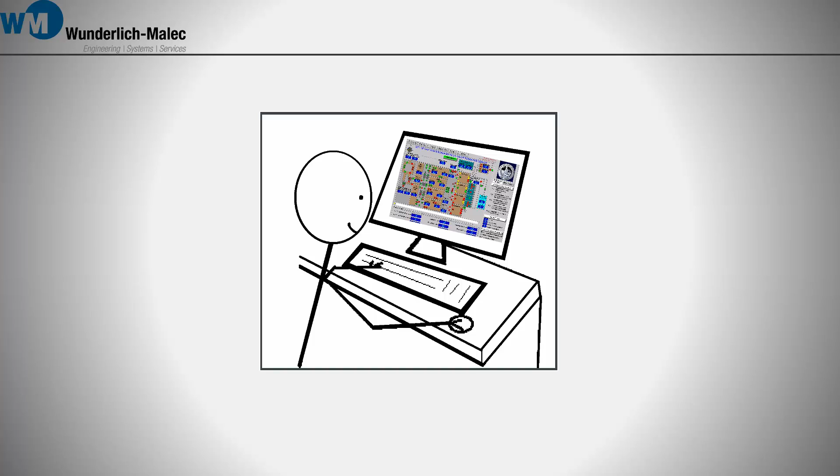Here is an operator checking a traditional SCADA screen. There appears to be a lot of detail, but very little information on how well the system is running. The operator must click through a number of screens to check trends and see all the equipment that is running.

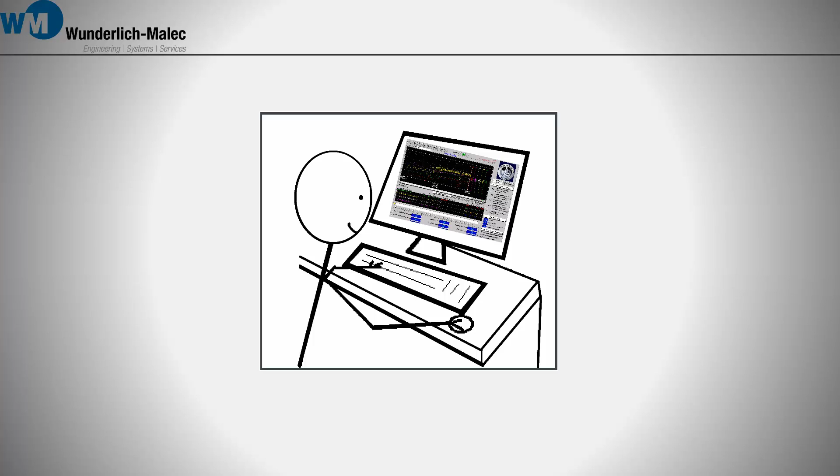Then a slew of alarms come in, but they're all red. He must now scan through every low, medium, and high alarm, as well as events, to try and find the higher criticality alarms, then either remember the SOP or look it up. All that wasted time could be catastrophic.

If only there was a better way. WME has created a standard, a hero, to save the industry from inefficiency, fatigue, and variability amongst operators. How was this achieved? By utilizing Abnormal Situation Management, ASM, and Wonderware's Situational Awareness Library.

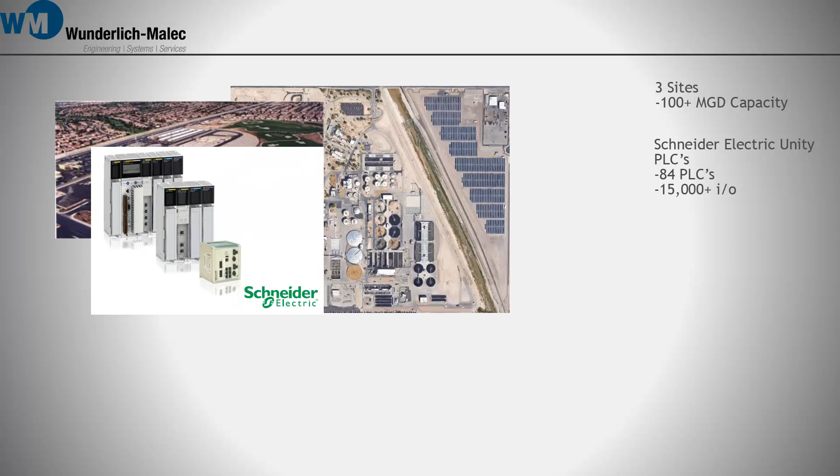WME has adhered to strict programming and development guidelines in upgrading 3 facilities with over 100 MGD capacity, utilizing 84 Schneider Electric Unity PLCs with more than 15,000 I/O, and a SCADA system developed with Wonderware's ArchestrA System Platform.

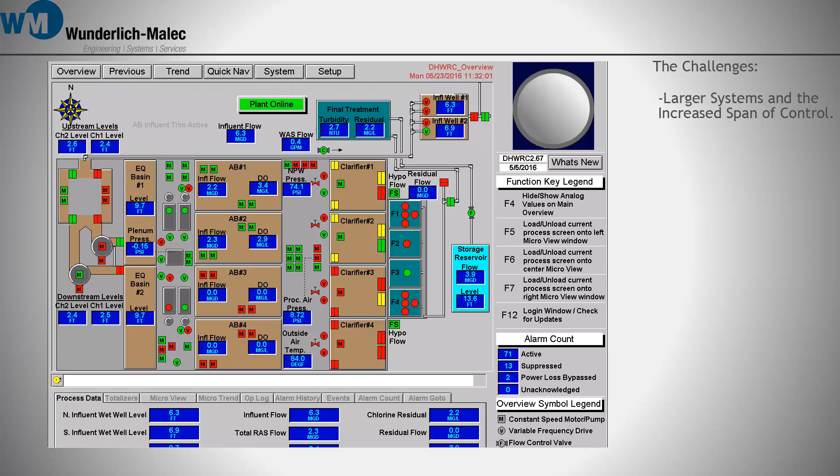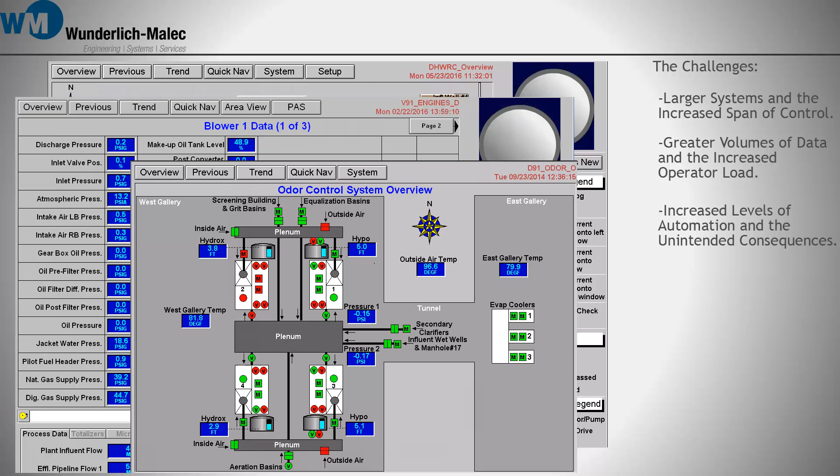The challenges of developing a new SCADA application are that we now have larger systems and an increased span of control. We're looking at greater volumes of data, which increases the load on the operators. There's an increased level of automation, and with that some unintended consequences, such as alarm flooding and abnormal situations.

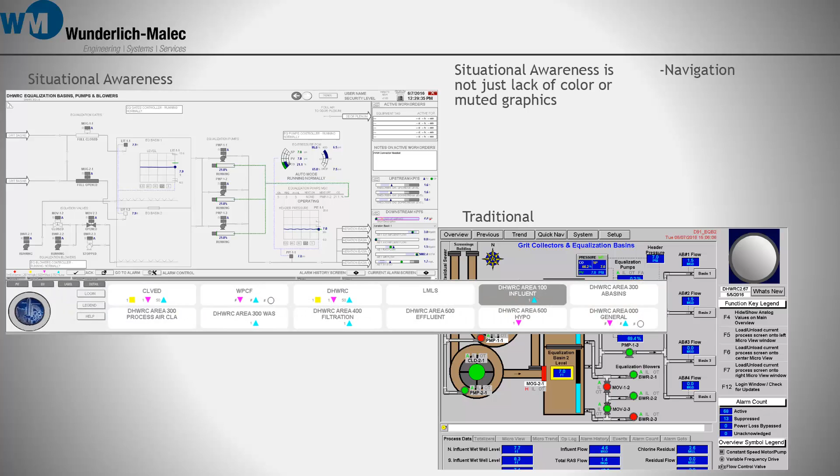Situational awareness is not just a lack of color or muted graphics, but a better way of navigating: alarm aggregation, information prioritization, and presenting information with context, which increases detection of abnormal situations before an alarm occurs.

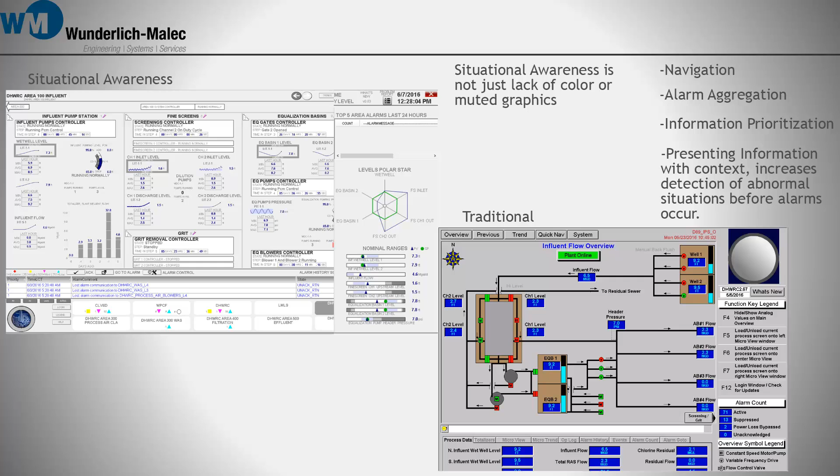The cornerstone of the idea is that an operator has only a certain amount of time, and we want to use it in a way that makes the most impact to the objective.

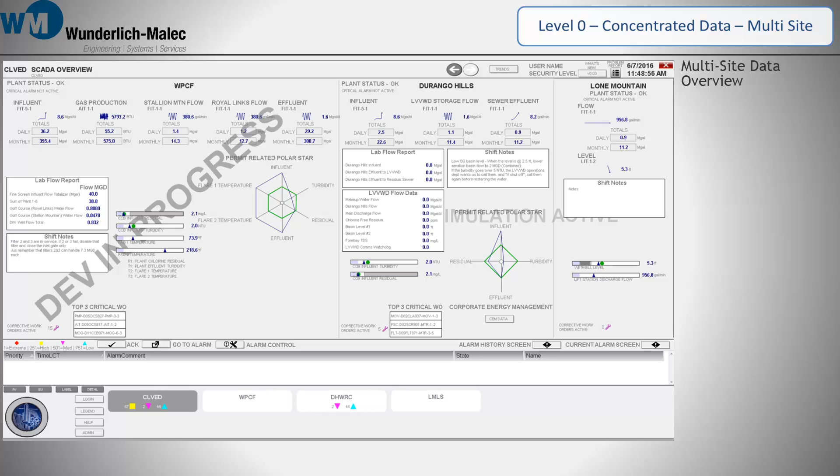Is there a critical alarm active at the site? We list the pertinent LIMS and shift notes. The permit-related polar star gives an at-a-glance look at how closely the process relates to the set point. And finally, what are the top 3 corrective work orders?

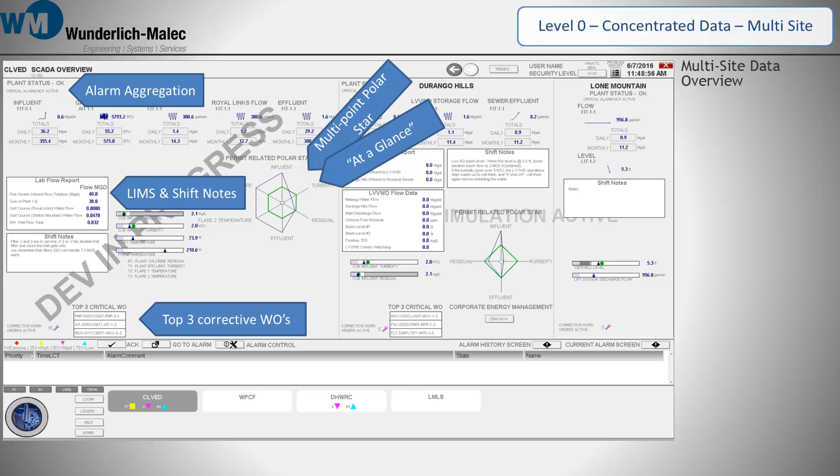Level 1 drills down to a single site's current performance data and key performance indicators, KPIs. This is a current level 1 screen.

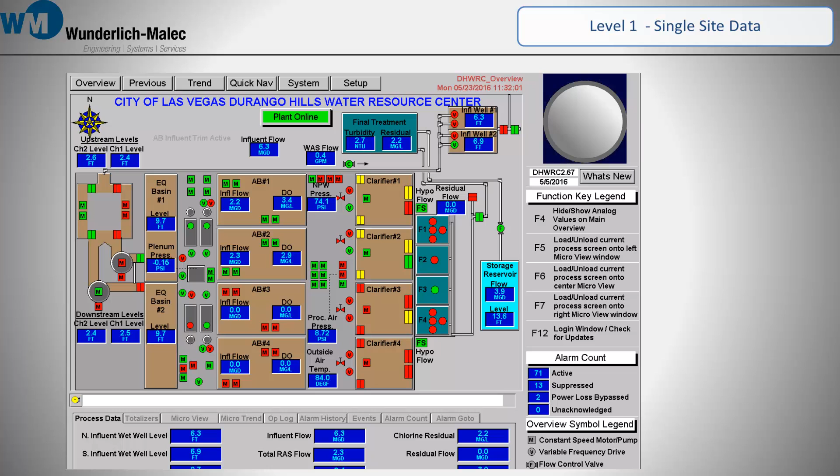It shows the overall plant well and what equipment is running, but unless you're intimately linked to the plant, it's unclear what processes are running normal and which ones need attention.

Situational awareness comes in, and the screen now focuses less on the layout and individual equipment of the plant and instead on the data and operation.

The PIQ, which is the process intelligence of each system, gives the current status of every area. Nominal range KPIs show the set point, optimal range, and alarming limits of each process variable.

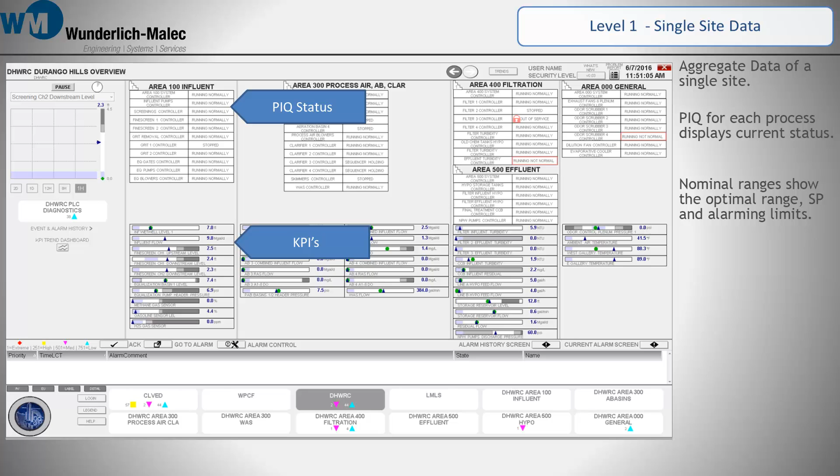This is the rolling trend display, and if we jump to a short demo, we'll see that every 10 seconds a new trend is displayed, showing the past 1 hour to 2 days of data. We can also hit the pause button and from the drop-down select a specific trend.

Navigation can also be accomplished in multiple ways: clicking the drop-down above each area to choose the desired level, selecting the PIQ to navigate directly to the level 3 screen, or the KPIs for the level 4 screen. The navigation bar along the bottom will open the corresponding level 2 screen.

Level 2 excels at showing process data and status. At the present level 2 screen, we again see a great layout of the area and the operation of some of the equipment, but nothing to help the operator understand how the system has been running.

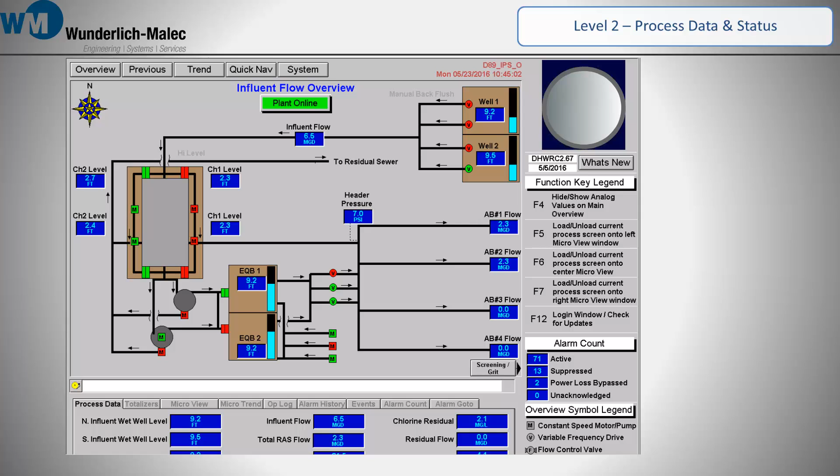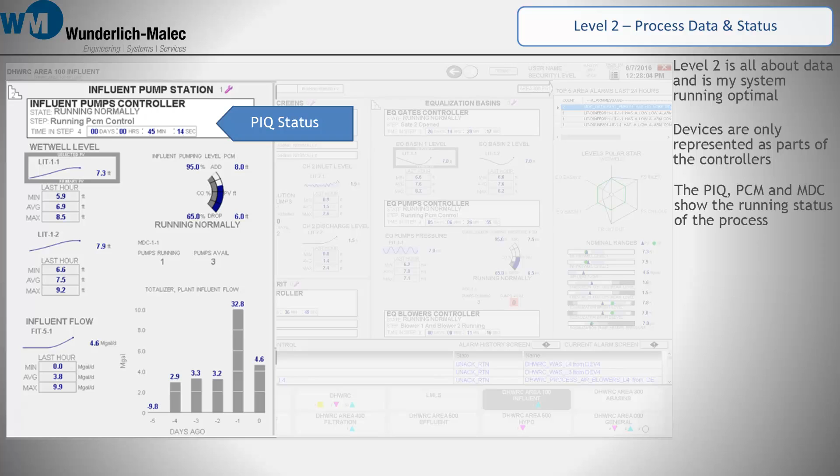Level 2 is all about data and whether my system is running optimally. Devices are only represented as parts of the controller. The PIQ, the Process Control Module (PCM), and pump set statuses all clearly display how the process is running.

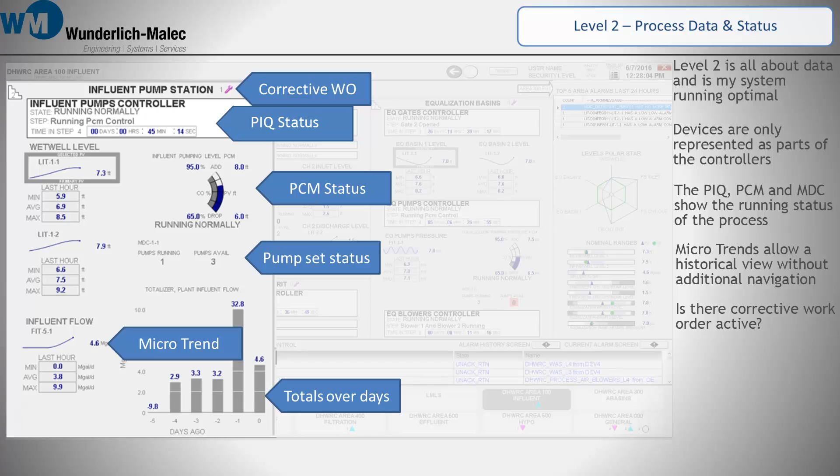Microtrends show a historical view without additional navigation, as well as the totals over the past 5 days. The wrench up top shows whether or not there's an active work order in the area.

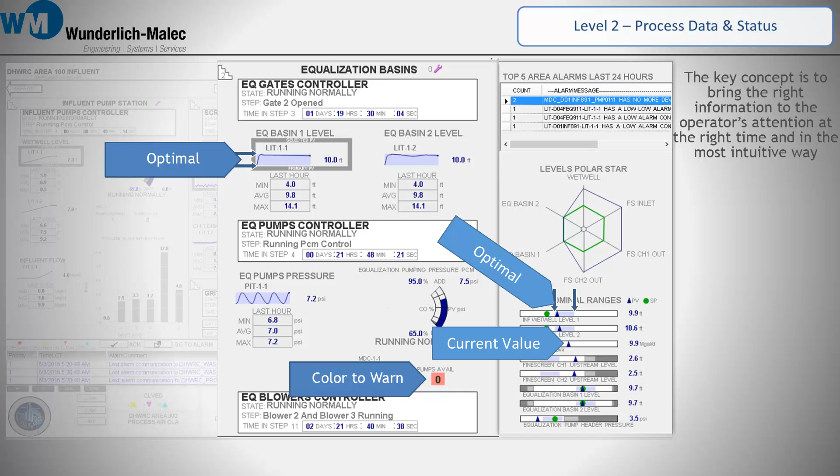The key concept is to bring the right information to the operator's attention at the right time and in the most intuitive way, such as color to warn if no pumps are available, or if the process is in the optimal range. The current value and its relationship to the set point and alarming limits, plus a polar star showing the current condition of the area's performance and the top 5 alarms.

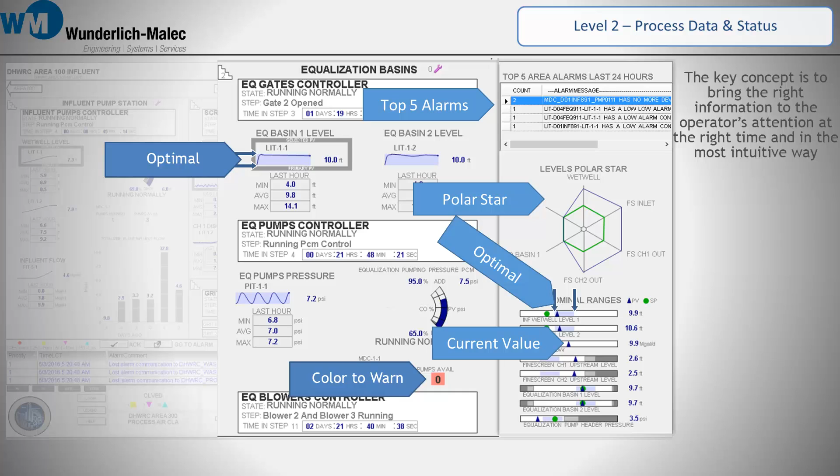At every level, situational awareness focuses on the most important data without having to open additional windows. Level 3 is for control and is optimized by providing more intuitive data and system health.

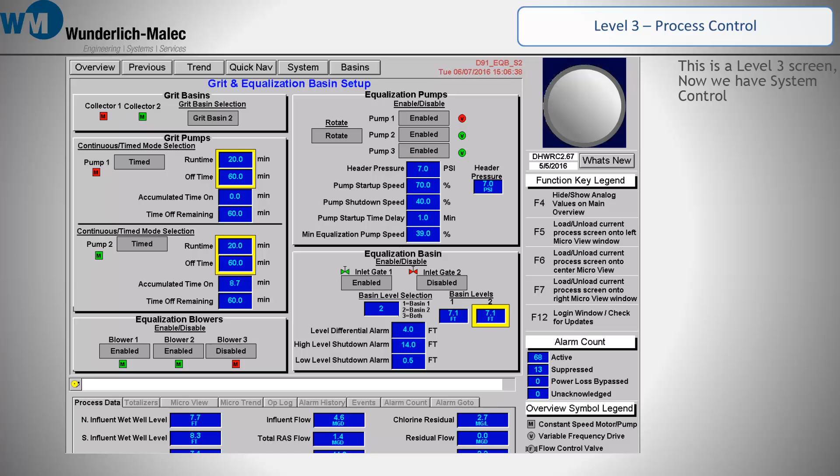Conventionally, for system control, the operator had to navigate down to the device level and then open the setup screen. Situational awareness combats this by removing that extra step and instead providing control at level 3. The process flow diagram appears at this level because it may be useful to the operator to have a visual layout of the system.

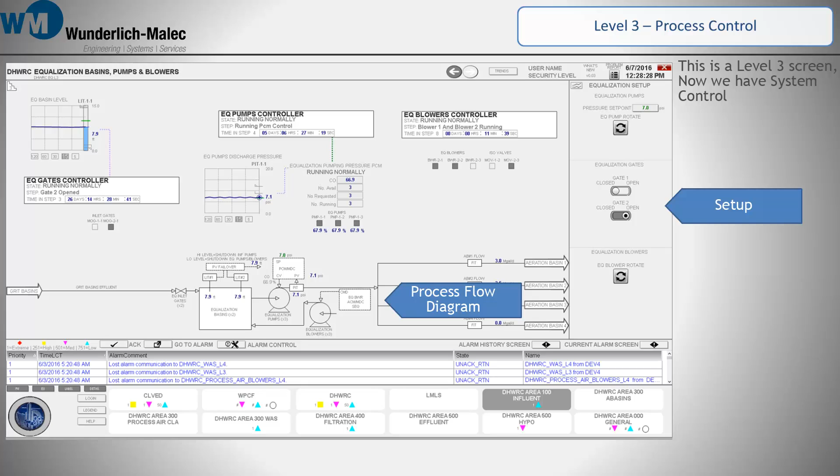The right side of the screen is reserved for what was the current setup screen. Here the operator can input set points, enable equipment, or select different modes. But the PIQ is the brains and it controls each process.

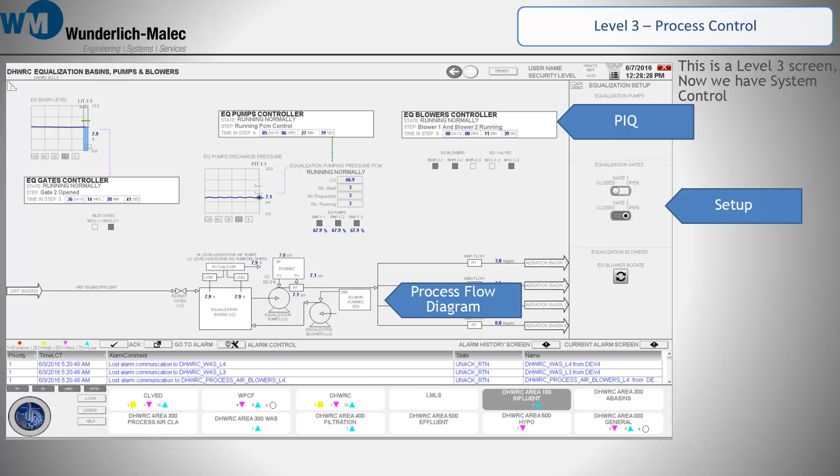By selecting the PIQ, the Device Control Interface (DCI) opens up to the right. Here we can put the PIQ in either auto or manual. Here are the manual controls and the out of service toggle. For further information, we can select the Diagnostic tab.

The audit trail shows the last 10 steps, the PLC setting for set points and time set points, and this area is for the control toggles.

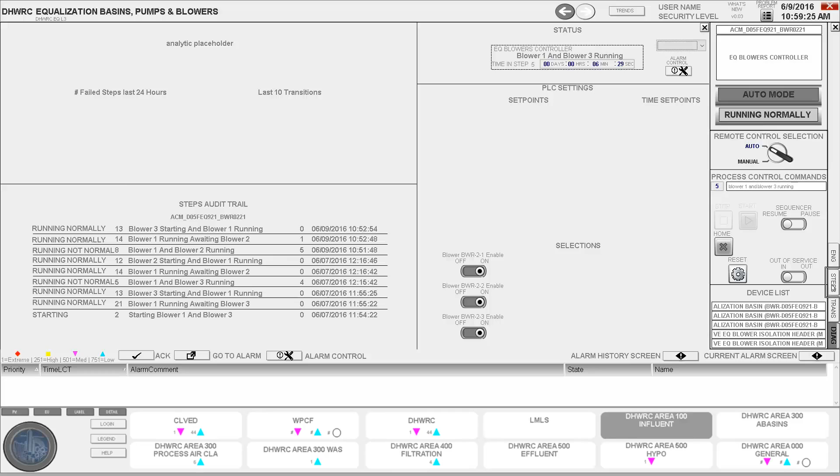Next we select the Steps tab, which displays all the available steps for this PIQ. The true brains of the PIQ reside in the Transitions tab.

Here we see the current step and how long it's been here, the previous step, and all the available steps the PIQ could go to based on these conditions, and the minimum or the delay time.

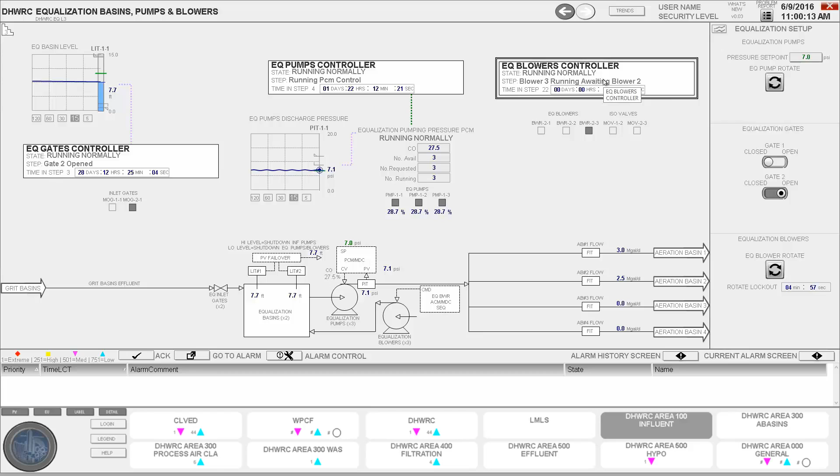As an example, let's hit the rotate button for the blowers. Then go back to the transitions page. We'll see in real time where the PIQ is going and why.

The current and previous steps have obviously changed, and here we can see both conditions are met to go to step 7. All we're waiting on is the minimum step time to pass, which we'll fast forward through for this demo.

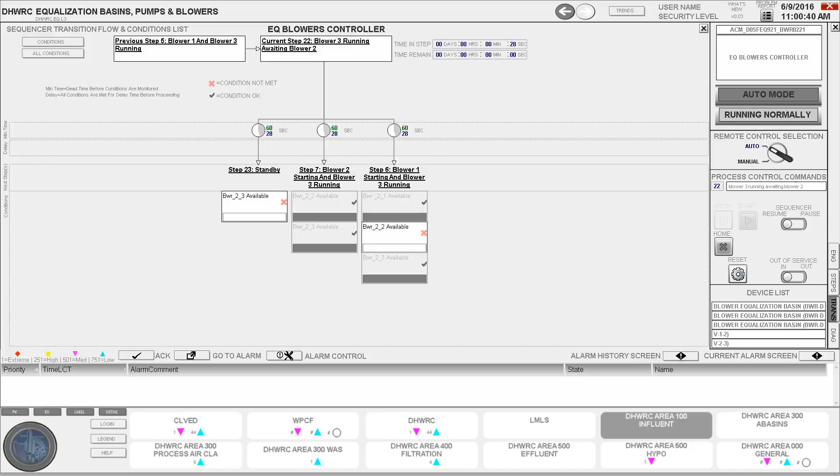Once the time has elapsed, you see we go to step 7. And after only a couple seconds we head to step 11, where the system is running normal again.

During normal operation, the need to see the step progression won't be used as often, but during a not normal situation or system upset, this tool will be invaluable to finding what is preventing us from advancing to the next step or seeing the history that caused the current step.

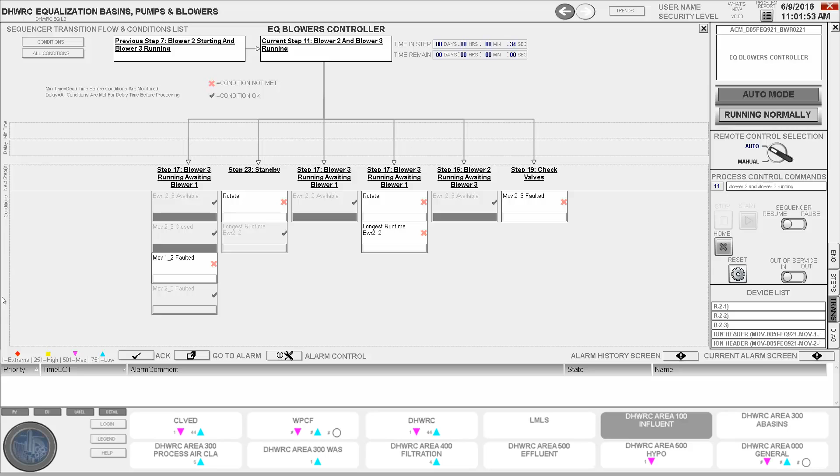With an aging workforce, operators' experience and knowledge needs to be passed on. Listing the transitions and conditions is one way novice operators can have better process awareness without having to consult the control strategy, saving time and increasing efficiency.

Level 4 is now less distracting and more efficient. It shows devices in relation to the layout and their functionality.

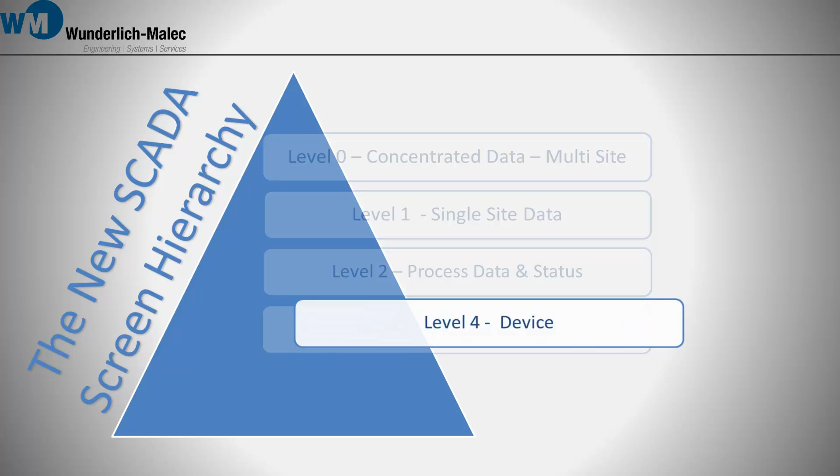Current PVs are shown, but if we want a trend, we have to select the ones we want, and then navigate to the trend screen.

Again, situational awareness gives the operator a better look at what the process is doing now and what it has been doing without further navigation.

Alarms are color-coded now for severity. An operator instantly knows which alarm takes priority.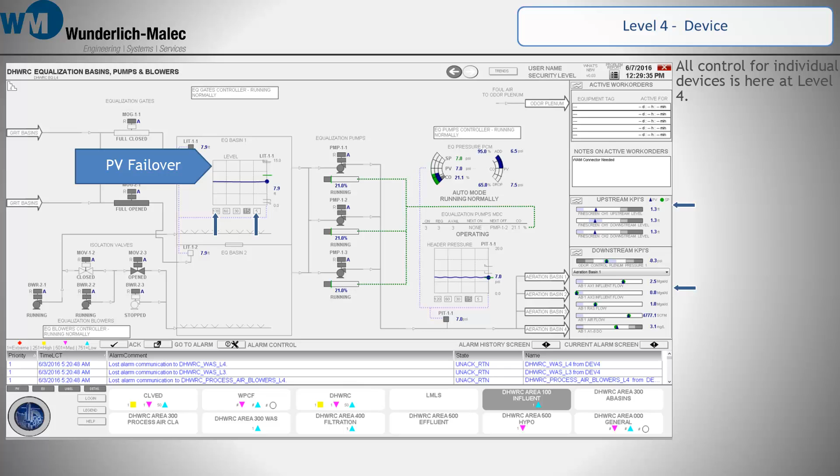Now we have upstream and downstream KPIs, so the operator can continue to keep an eye on the area's health. The MDC, multiple device controller, handles lead lag, first on first off, or duty cycle, giving the operator all the information required.

The purpose of the PCM is to provide analog PID control for level, pressure, flow, or temperature to either a single device or to be used in tandem with an MDC for control over multiple devices.

The Jarvis-style display shows the set points in green, PV in blue, and the CO in gray in an easy-to-view bar or digital display. The add-drop limits are displayed when used with an MDC, and a display will show a countdown to let the operator know the time remaining until a piece of equipment is dropped or when it will add.

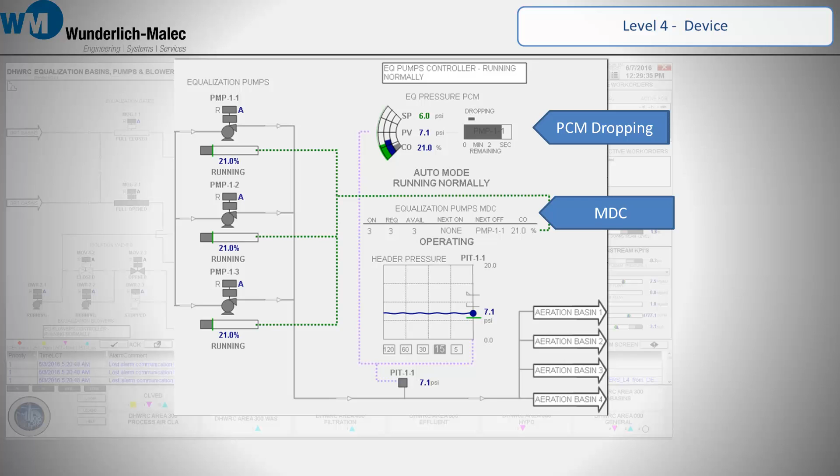When we select a piece of equipment, the Diagnostic tab on the right can be used for operations and forensics. There's device-specific trending. The audit trail lists the last 10 changes the equipment has made, but can be expanded to the last 30 days to look for trends or failures.

The PLC settings give a more in-depth look at what is expected from the equipment. For example, the pump shows restart delay remaining and how many starts, while the valve will give the interlock action and show the open-close travel times.

The equipment work order shows current work that needs to be done on the equipment, as well as repairs that have been made and completed in the past.

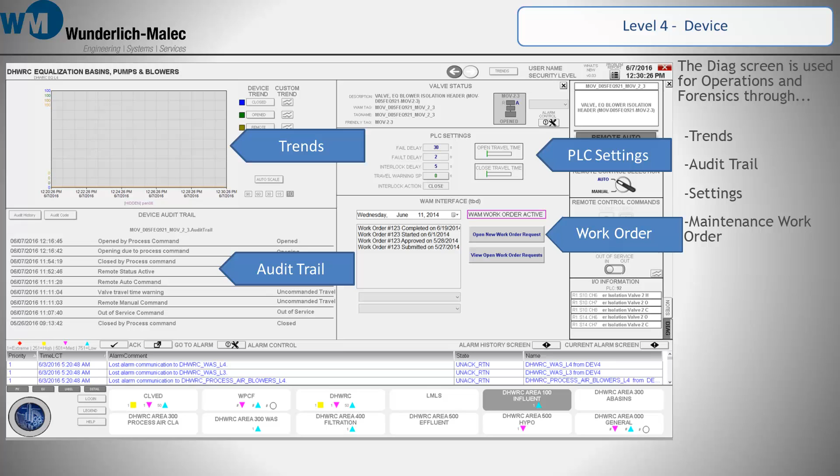For additional troubleshooting, maintenance can use the PLC diagnostic screen, which serves as a tool to SCADA for the Modicon Quantum 652 processors. It displays the current value at each rack slot point, and when opened further, gives a description and scaling of the equipment that has landed there.

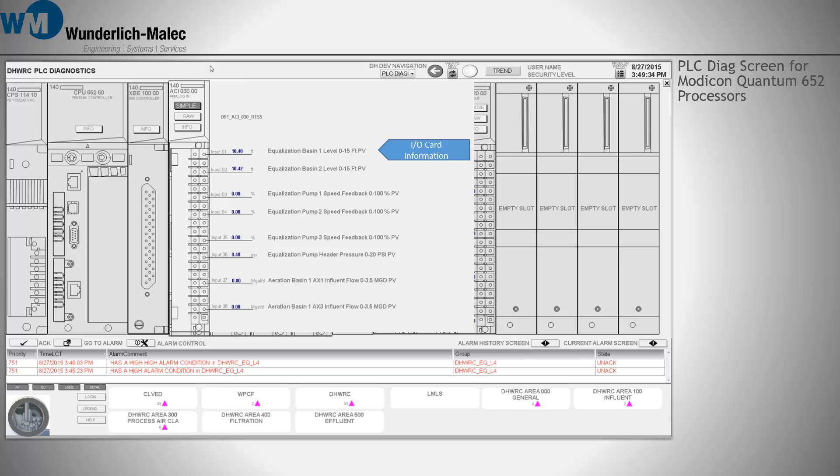Now, see how an operator views the plant with the help of situational awareness and the new tools available to diagnose a problem.

From the Level 1 screen, we can see the systems are running normally, or out of service. Looking at the KPIs, we notice the fine screen level is slightly above normal.

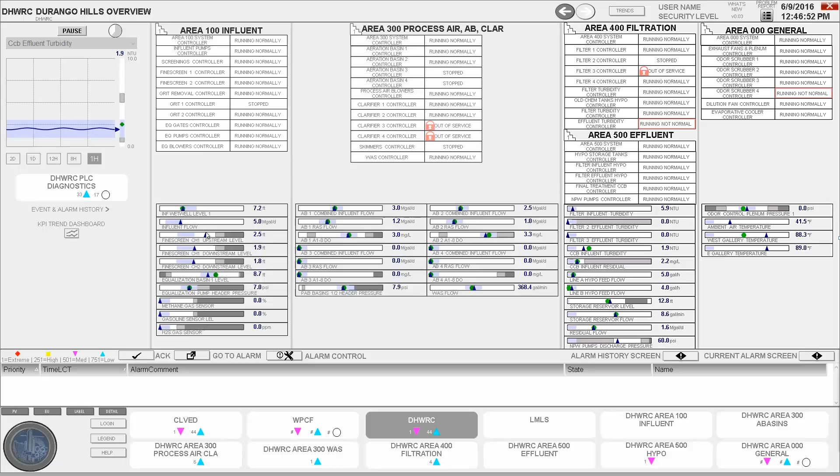Using the drop-down, we navigate to the Area 100 overview. Here we have the micro trends to show the fine screen level over the past hour, as well as the polar star to quickly show that our system as a whole is running slightly above normal, and therefore we can navigate over to see how the downstream systems are working.

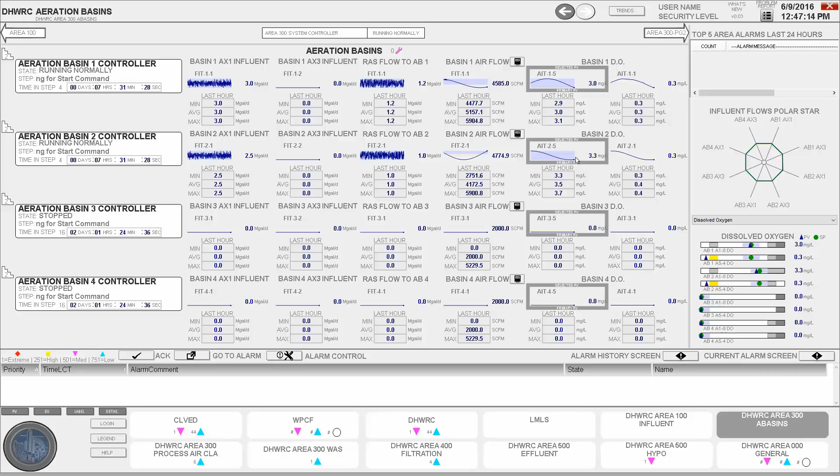They're running normally, everything is within typical range, and the polar star easily shows the system is in balance. Further downstream, we see the clarifiers are also running normally, so we can use the navigation bar along the bottom to go back to Area 100.

The fine screen levels have continued to rise, so we can drop down to level 3 to get more information. On our PV failover trend, we can go back to see if there are any patterns. It alarms, but noticing the problem beforehand gives us time to make an informed decision.

The alarm has caused the screening controller to go into a not normal state. To see why, the operator goes to the transition page and sees that the PIQ will remain in fast mode until the channel drops below 3 feet, or if it goes above 3.5 feet, it will interlock the influent pumps.

We can now drop down to the level 4 screen to investigate the alarm further. Here at level 4, we can see the fine screens are running fast to clear out any large debris, and the levels are going down, so the extra debris must have been the problem.

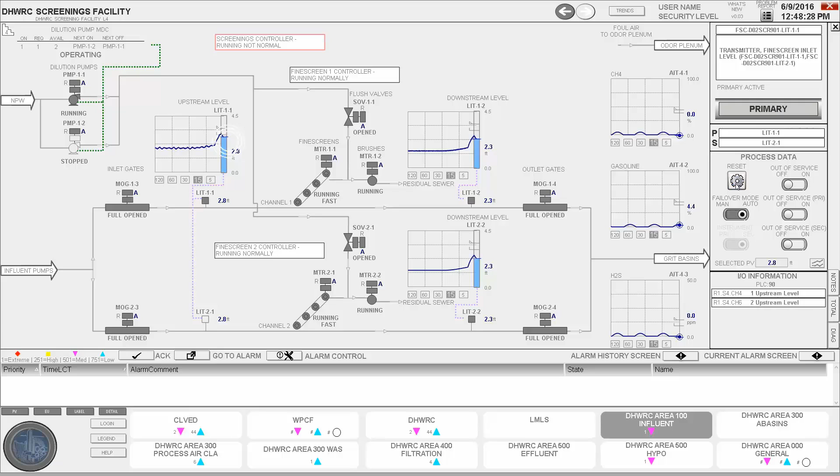Once below 3 feet, we can clear the alarms and then check to make sure the PIQ goes back into a normal operation. Even though the levels are below 3 feet, the fine screens are still running fast.

Back at level 3, we select the screening controller again and look at the transitions. It now shows that the level condition has been satisfied, but it will continue to run for 60 more seconds to clear out any remaining debris in the channel.

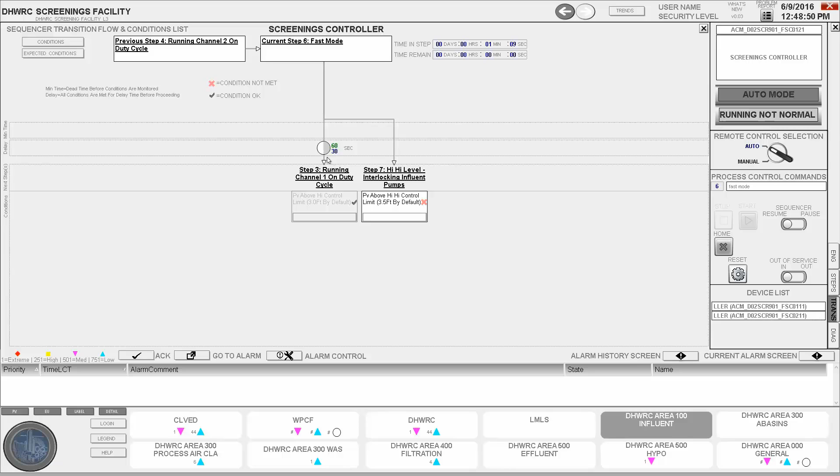Success. Even a novice operator using situational awareness is able to see where the process should be, what it's doing, and what needs to be done to correct it.